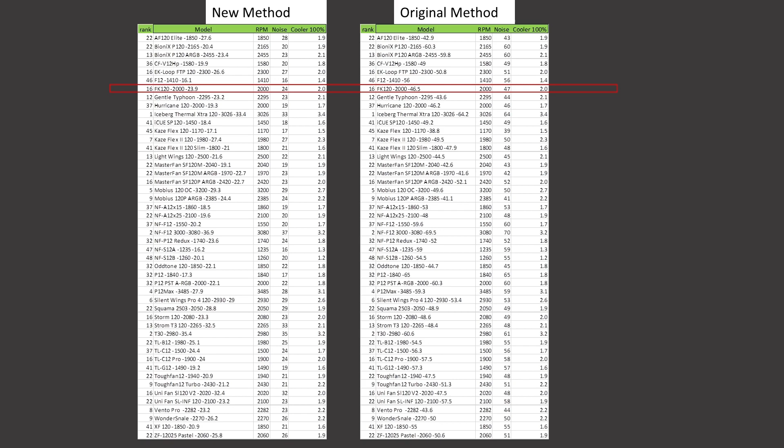At 100% PWM fan signaling through the CPU air cooler, it retains its position at 16th, since noise is not a factor here. It is a listed value, but it's not the factor driving its placement. That's why there's no change in position. Next up, cooler value proposition. Originally, it was ranked 10th. It is now ranked 42nd. So overall, a huge drop in its value proposition. At 100% PWM fan signaling, the value proposition is ranked 21.

CFM testing, noise normalized, it was ranked 9th overall. It is now ranked 42nd. So again, a huge drop in its ranking. And at 100%, it retains its position at 21. In terms of its value proposition, noise normalized CFM testing, it was ranked 11th. It is now ranked 35th. At 100% PWM fan signaling, it was ranked 21 and retains that position.

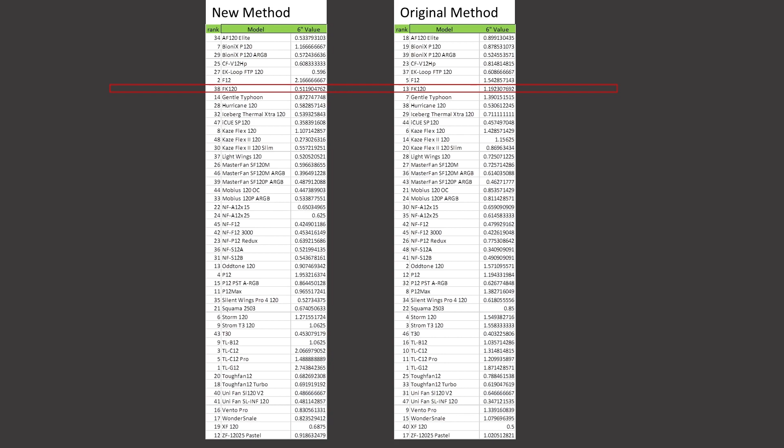Moving on to the case simulation test, noise normalized, it was ranked 6th. It is now ranked 42nd. At the 11-inch mark, it was ranked 6th. It is now ranked 48th, near on dead last. So that is a huge drop in its positioning. In its value proposition, it went from 13th to 38th, and at the 11-inch mark, it went from 7th to 48th. So overall, not a great position for the FK120 to be in.

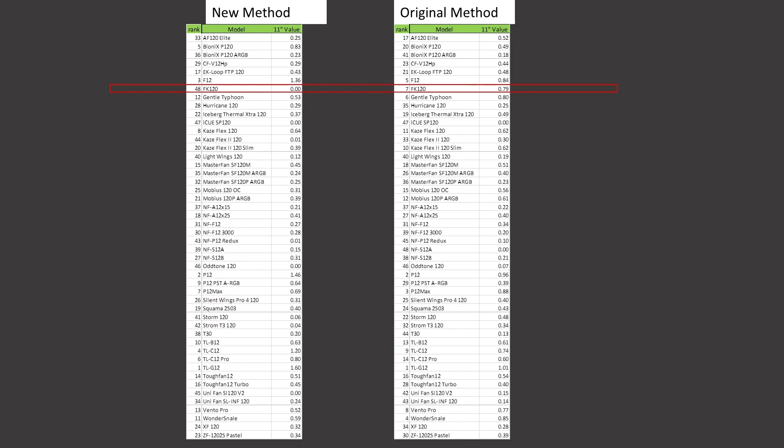Let's get into the specifics. So first up is the case simulation test. This can be looked at in a couple key different ways. The first way is, what size case do you actually plan on buying? Are you buying a small form factor case for the 6-inch mark, or are you going to be using your fans as bottom intake fans, or I should say top intake fans, depending on the case layout, to blow air directly into your GPU? Well, then the 6-inch mark is the main factor you're going to want to be taking a look at.

Small form factor being something with a front-to-back airflow, so it'd be a larger small form factor, not the ones a lot like the Fractal Design North, I believe, that suck in air from the sides and blow it out the top, or ones that blow air from the bottom through the top. You want one that's front intake and blows front-to-back airflow, because this is most important for air coolers, because you want the airspeed hitting the fan to be as high as possible so that the air cooler fan doesn't have to work extra hard to accelerate the air through it. It just has to sort of redirect the air and accelerate it rather than essentially pulling a vacuum, pulling the air to it.

So that's why you want it to be as high as possible. For AIO or liquid coolers, the equation is a little bit different as to what you need, but you still want good airflow going through your case.

But my opinion is you would put it on the top and have it be a pull-out type scenario. So you're actually just using the radiator fans to extract the air from the case. So you still want good fans blowing air into your case, but it becomes kind of less important. I don't want to say it that way, but I guess it's true.

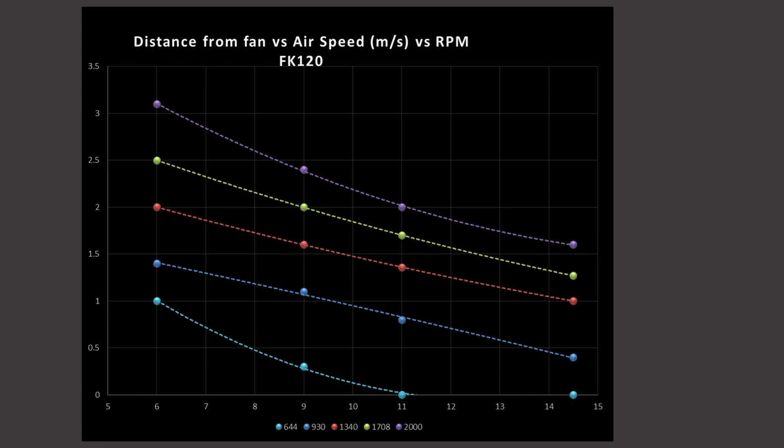Now, that's not entirely true. Eventually, it'll build up pressure inside and will find a way to escape, but the flow pattern will be so slow that you're not effectively cooling your case. That's basically the main case in point here.

So what does all this mean? Well, I have a control fan. It's based on 3 parts A12x25 to 1 part A14, blending them together to create what isn't the perfect control fan, but it's a very good composite fan that indicates good performance versus bad performance. And what do we see from the FK120? Well, it's got bad performance, unfortunately. I like the look of the fan.

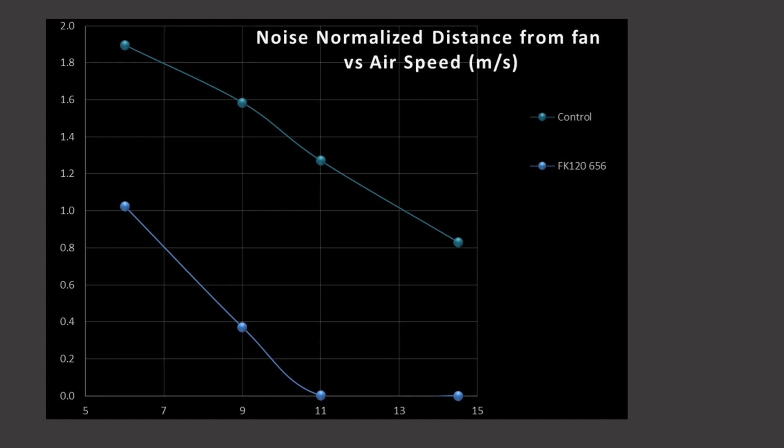I call it in an okay to good fan category because it's close to my control fan, but it is technically, what am I reading? How about at the 100% PWM fan signal mark? Well, right here we see that my control fan is in this teal line, and the FK120 is outperforming my control fan by a pretty good amount. So I'd put it in a good to better category, not quite the very good mark, but certainly better.

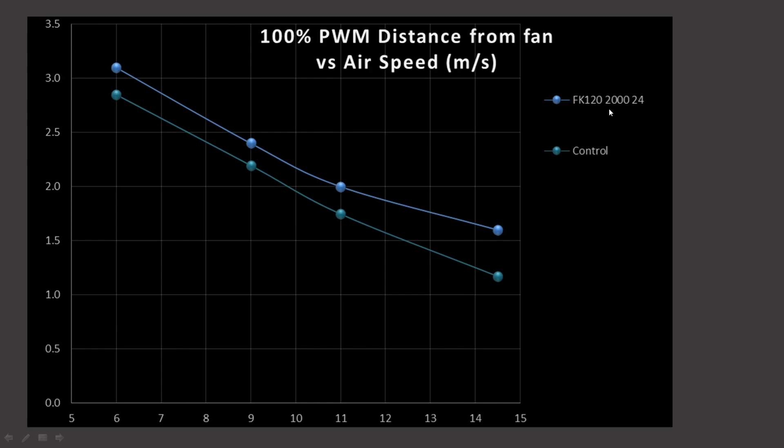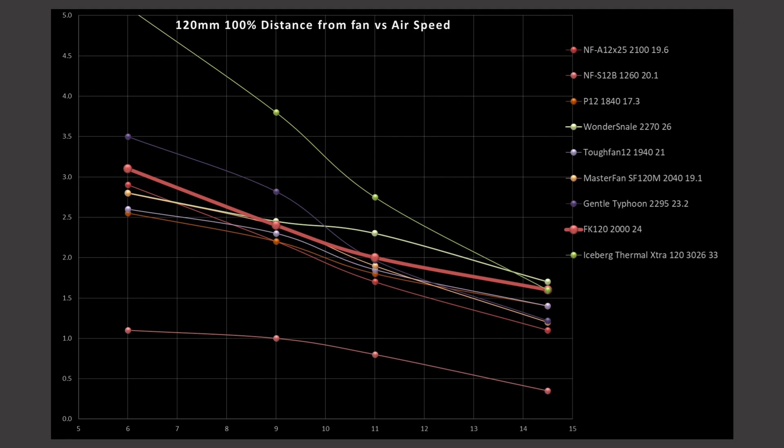And if we're looking at its noise level in this graph, at maximum RPMs, it's not that far off some of these other fans, but the P12 is substantially lower than it. The A12X25 is a good 4 decibels lower than it. And again, as a note, every 10 decibels is a doubling in noise volume. So the FK is actually not terrible once you start getting air moving.

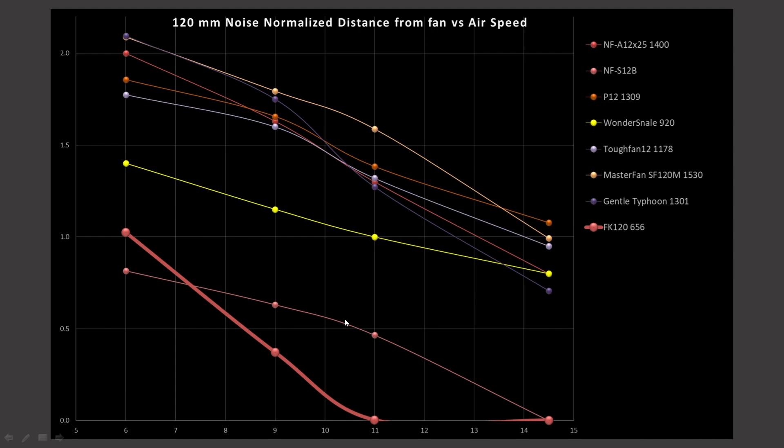So next we have the 9-inch mark, airspeed versus decibels. And just to come back to a previous graph, the 9-inch mark was chosen because at the 11-inch mark, I had so many fans that just kind of drop off to 0 here. So it was really hard to get good, well, any data at all at some point. So the 9-inch mark was chosen where fans are still giving me enough airspeed to get good measurement data and show highlighted differences between good airflow fans and poor airflow fans. Because all this changes at different distances. So this is just my chosen distance.

I have a feeling that it's got a lot to do with the blade design and potentially the motor design. It probably just needs to be thickened up, so they need a more powerful motor in it to then drive that heavier fan. But that would probably fix a lot of their harmonic problems. So I'd just like to see Deep Cool take a closer look at this fan and try to dampen out some of the harmonics that we're seeing, because it just resonates and makes it noisy.

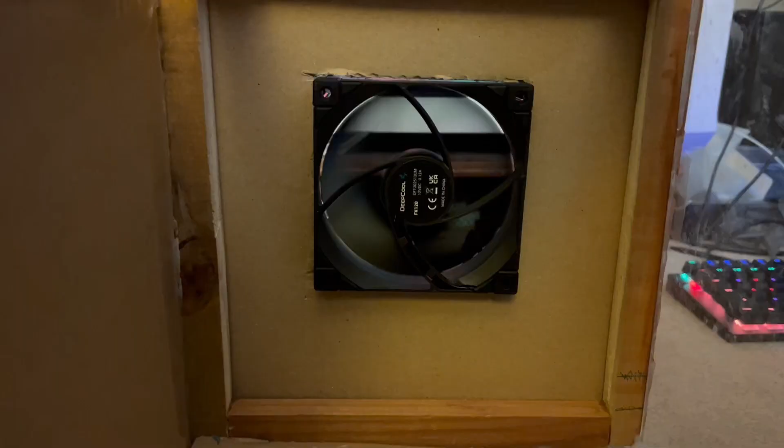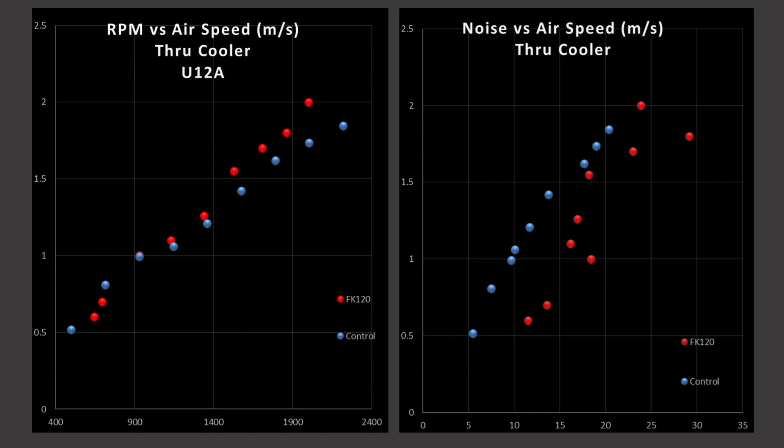Here the fan is pretty bad until it hits higher RPM. So again, higher than 1,400. And then we hit another harmonic. If this harmonic wasn't there, I'd call it good enough if you want to run the fan at higher RPMs. But because of the harmonics that we're seeing in it, I just can't call it that.

All right, the next one is how does it compare against every other fan? So first up, a little bit of information. This key over here is from when I did testing on my U12A cooler. I did a whole testing methodology. It's in a video on my channel, but the short version is I did a CPU only workload. I let it go to thermal max, 100 degrees C, where it starts clocking itself.

I let it come to steady state, and then I would adjust the PWM fan signal down incrementally by 10%. So 100, 90, 80, 70, that kind of thing. And would let the CPU come to steady state at each PWM fan signal. I would take the airspeed at the back of the cooler. So I got an airspeed to wattage, so I can equate the two, estimated.

Because every fan blows air slightly differently, it's not 100% exact science, but it gives a good ballpark. For the U12A and my CPU, the i7-11700K, it's going to be accurate to within like 5 watts at a particular airspeed, which is pretty good. I mean, 5 watts does give you more clock speed, but depending on where you are on the clock to wattage curve, it's either going to be a lot or a little. So now disclaimers out of the way.

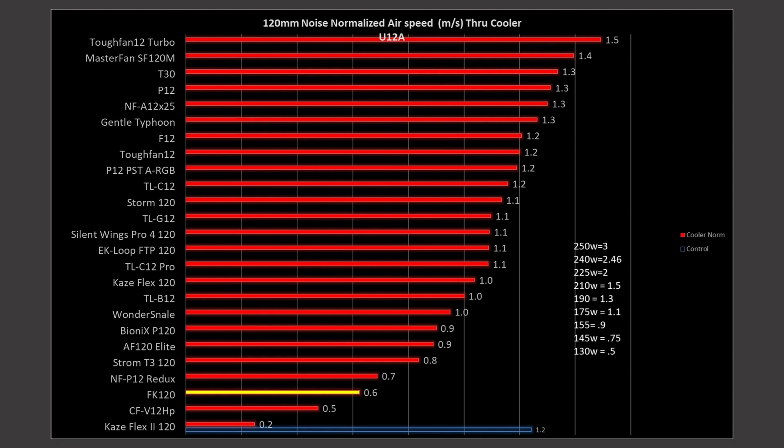Well, it's pretty far down at the bottom of the graph, so no need to talk about that further. How about at 100% PWM fan signaling? Again, wattages per airspeed. Here, the FK120 struts its stuff, being in the upper half of the graphs. And beyond that, its noise level is actually pretty reasonable compared to other fans around it. I wouldn't put it in the best category for fan noise, but it's certainly in a better category.

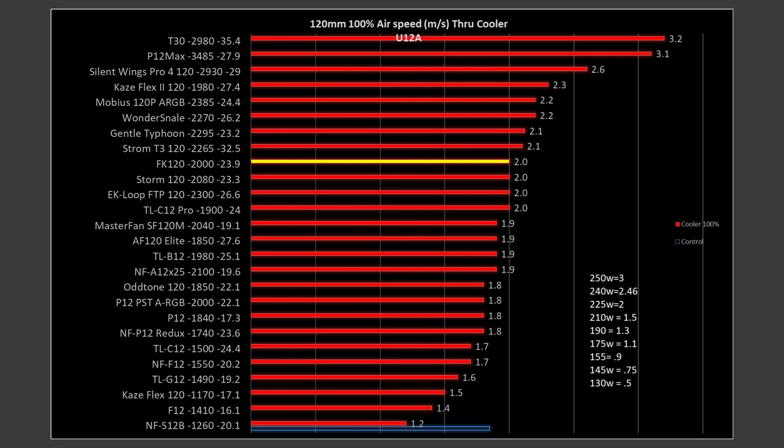And it is outperforming in my testing other competitive fans, such as the A12X25. It is pushing more air. And I should note, as I did before, the anemometer is accurate within plus or minus 0.1 meters per second. However, I do repeat testing, averaging results. So the ranking is what the ranking should be. Just note that the fans may have effectively the same airspeed because of the accuracy of my current equipment.

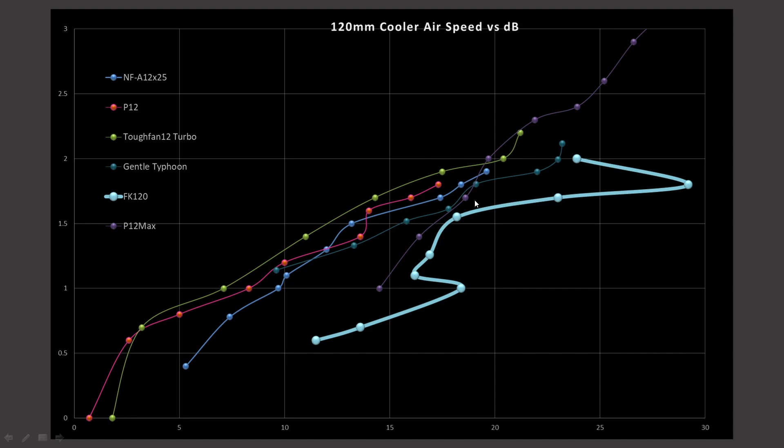How about airspeed through the cooler versus decibels? Well, the FK120 shows it's not very good overall. It's those harmonics. It could do so much better in whatever is going on here. They need to figure out this part where it's getting this nice steep climb and figure out how the airflow is traveling over the fan at that range and just reshape the fan so that it continues along that path.

Next set of graphs is RPM versus CFM testing. So I'm not a huge fan of CFM testing overall unless it's for specific use cases. A lot of YouTube channels and channels in general use CFM testing to say this fan is good for cooling, for case cooling. That isn't accurate. It might be, but that's why there's the case simulation test. In essence, the CFM test is you've got a tube that is the size of the fan, so there's no room for it to spread out.

To calculate CFM, so CFM is cubic feet per minute. You know the diameter of your tube, so divide that by 2, R, square it, so R squared. So let's just say that was in feet, so feet squared. And you know pi, so 3.14, since it's a circular tube. So pi R squared. Anyways, you know the airspeed, so let's have that be in feet per minute. So feet squared for the surface area times feet per minute. So feet squared times feet is feet cubed per minute, cubic feet per minute. Hooray! We did math.

But when you're blowing air down a tube, so let's say you have a diffuser on the fan that has a tendency to make the air spread out. And you have another exact same fan with one that helps align the air so it's now traveling in a straight line. And then you put them smacked up against the tube. Well, the diffuser might be trying to spread out the air, but the air has nowhere to spread out to because it's still traveling down the tube. So the airspeed is going to look a lot closer to the one that has a concentrated airflow than it would in my case airflow test, thus hiding the fact that a fan has a tendency to spread out air.

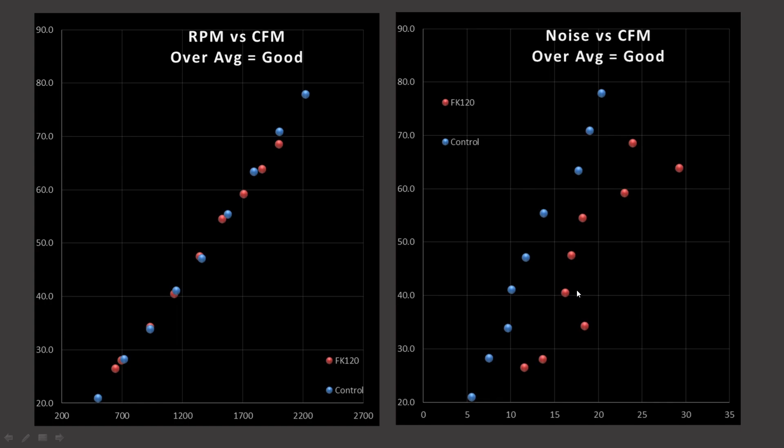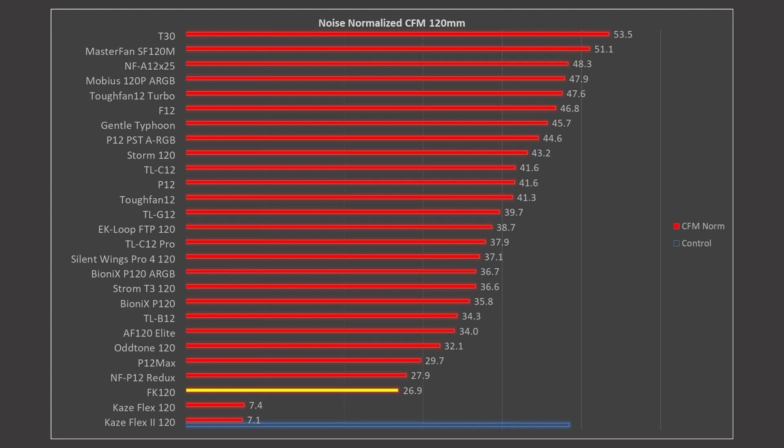Okay, so we're going to move quickly through these tests. They're very similar overall to the heatsink test. So airspeed in CFM in the vertical axis, and RPM or decibels in the horizontal, depending on the graph. And how does it compare to my control? Well, they line up near on perfectly. No surprise. How about noise versus CFM? Well, the FK120 once again underperforms. Noise normalized compared to other fans, it is towards the bottom of the graph, but it isn't utterly terrible compared to the worst ones. But it is at the bottom of the graph, so thus it would not be recommended for noise normalized results.

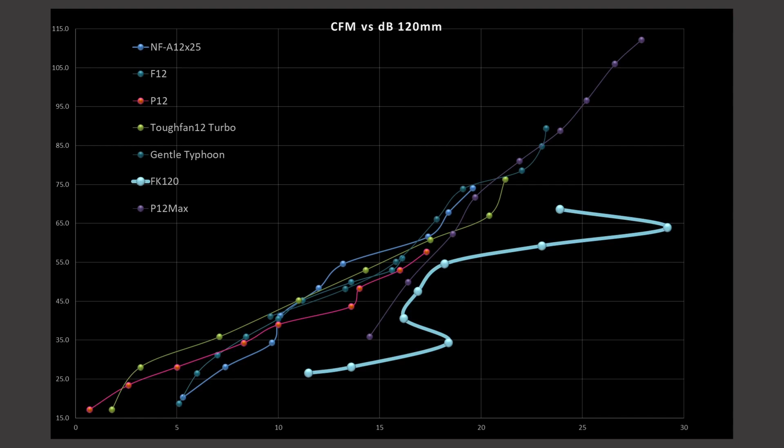All right, we are on to the value proposition. The FK120 is a $20 fan. So for calculating performance per dollar, it's literally airspeed or CFM divided by dollars, and it's just as simple a calculation as that. So who are these graphs specifically for? Well, if you're on an ultra tight budget where you're trying to squeeze every penny out of your build to get the best you can for the absolute minimum amount of money, you would want to pay special attention to these graphs, because this is where you're going to get the best fan for the least amount of money. It's not going to be the best fan, but it gives you that best performance per dollar ratio.

If you have a little bit of extra money and some flexibility with where you're spending it, so you want a little bit better fans for noise performance, you want better airflow performance, you want a particular style, or you want RGB, then you'd weigh in the performance data that I'm presenting here with the performance data that we saw before to determine which area is the most important to you to select which fan you want. And then, of course, if you want RGB, then you'd be selecting its RGB and which style RGB.

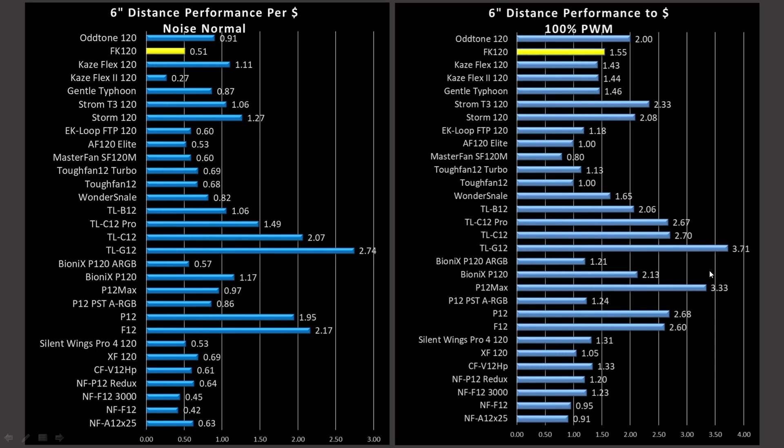So what are we seeing overall? Right now, for all the graphs, the left side is going to be noise normalized, right side is going to be 100%. The FK120 is towards the bottom of the graphs, so no surprise. How about at 100% PWM fan signaling? Well, it's in the upper middle, but it's a far cry from the top best fans. How about at the 11-inch mark, noise normalized?

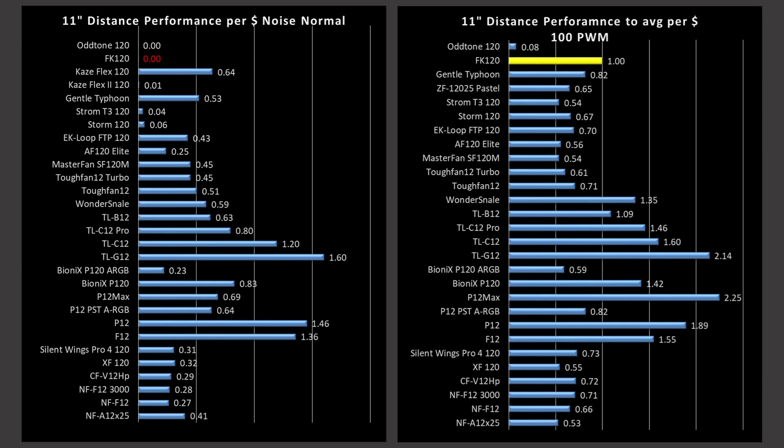Well, it has an airspeed of 0, so it's utter trash. At 100% PWM fan signaling, it is in the upper part of the graph. However, the other fans that are much cheaper in value just completely blow it out of the water, thus making it not the best fan for case airflow application.

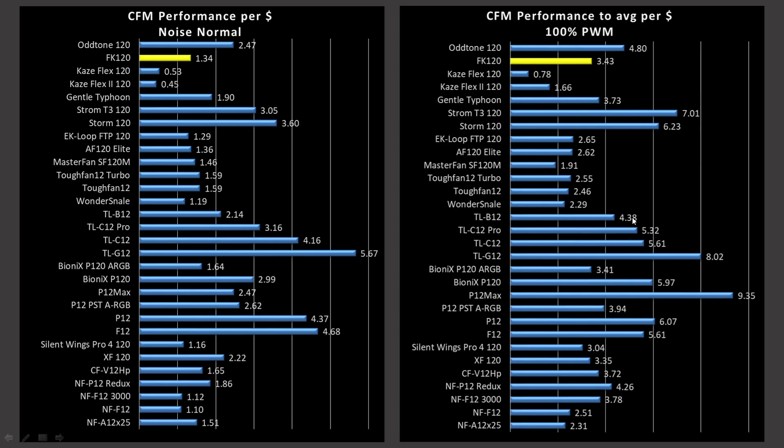Basically in the middle for noise normalized results. Actually kind of below middle now that I'm looking at it more closely. At 100%, well, it is technically in the upper middle, but it's just such a far cry from the best fans. So where does that leave me with the FK120? Well, I think the FK looks pretty cool. There's no fan on the market right now that looks like it with the wide tips, narrow body.

But its value proposition isn't that great. Its noise normalized performance isn't that great. Now, it could be that the samples I got were part of a batch that were just inconsistent and noisy. I know I've heard about it from their cooler review that some of their fans have been on the noisy side. So it could be that I just got a couple lemons, but that leads into another problem.

How can you guarantee that you're not going to get a lemon when you buy the fan, and then have to deal with returning it and getting a new one, and yada yada yada, that sort of thing? So there is an inherent risk with purchasing this fan. So I can't make that decision for you. I think it looks good. Its overall performance isn't bad, but it's just a little bit under the best performing fans.

So really, you're only going to buy it if it comes with your case, your cooler or whatever, or you just really like the style. That would be why you have this fan. I guess for me, I wouldn't go out and buy it just on its own. But that's a decision for you to make. All right, let's go to my wrap it up section.